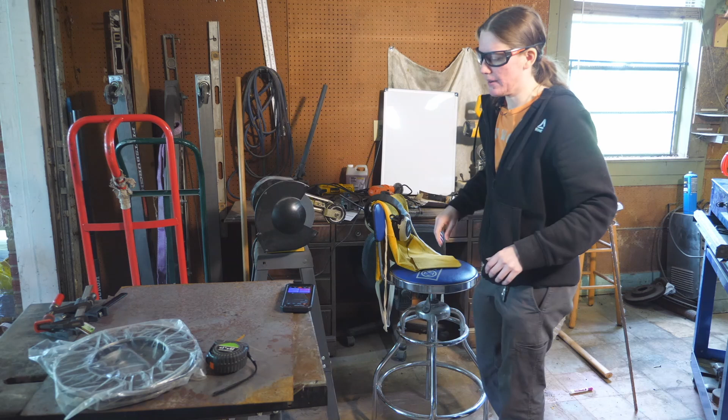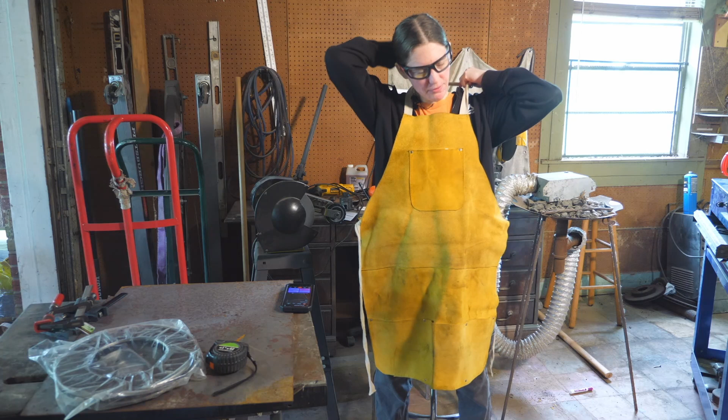All right. I guess I'll put these guys over here for the moment. Let me put my apron on, just because it's part of my costume a little bit, I guess. And today, for the most part, I probably won't actually have to use, okay, I think it should be all right. Sorry about any popping or clicking that happened when I put that on.

So first of all, we're going to kind of design the coal forge. And so what I did was I brought my old coal forge inside the shop, right? So this is it right here. And basically what this is, it is a piece of cast iron. I'm not entirely even sure what this pan is.

We got it in the boating section of our local farm supply store. And I don't know, so maybe it's like a propeller or something. I mean, it could be any number of different pieces of boat. But it's kind of got scalloped edges and a hole in the middle. So I don't know, it kind of looked like a hubcap or something.

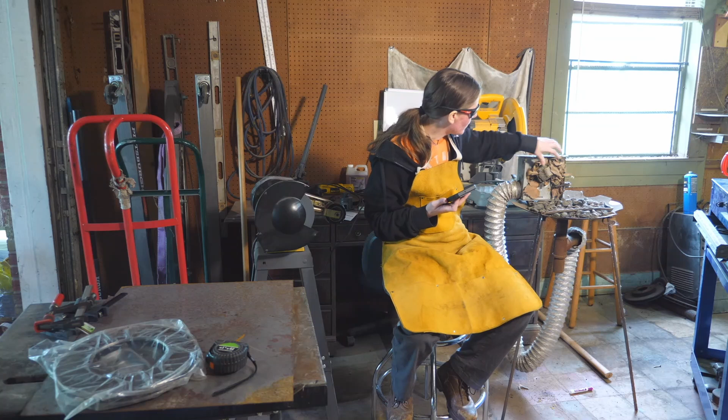Anyway, so I kind of welded some 1/2 inch round stock for legs, and I put in some like clinker breaker. And then this is my, well, that's covered in leaves, but this is an old bathroom fan. So it's like a vent fan that, you know, when you take a shower and you've got all that steam in there, you turn on the bathroom fan, and that's what this was. So that's how I got the oxygen for my coal forge.

And so right now, this guy is what I have as far as a coal forge. So it's really small. It's not very sturdy. You can kind of see that it jiggles quite a lot. And it does not hold a lot of weight. So when I decided that I wanted to do things like axe heads and a little bit of Damascus or some forge welding, I knew that I was going to have to come up with a different solution for a new coal forge.

So that's what we're going to start working on. This is just not sturdy enough for the amount of steel that I want to put in it. So we're going to start from scratch. And we've got a good selection of materials over here that we get to work with. So first things first, I'm going to get rid of this so I have a little bit more room to walk around in. I just brought it in here because I wanted to make sure that you guys kind of see, you know, what our goal is.

So we need a place to keep coal, a place for the air to come up and pump more oxygen into that fire to get it up and hotter, and a place to kind of allow the material to rest. And this is really small, so there's just not enough room for that. So yeah, I'm going to move this out there, and then we're going to start talking about some of the materials that I've gathered, and we're going to start designing it.

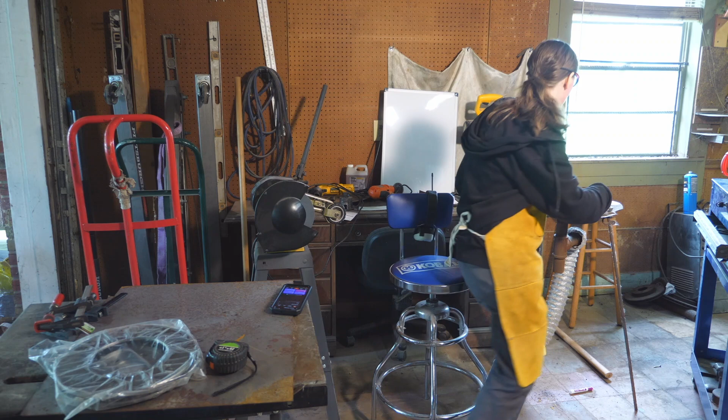So off this goes. Whoa. This guy only has 3 legs, so it's kind of a weird tripod thing going on. I dropped my marker. Okay.

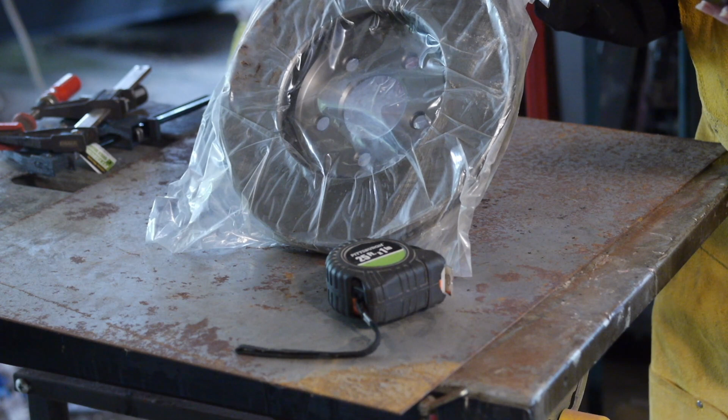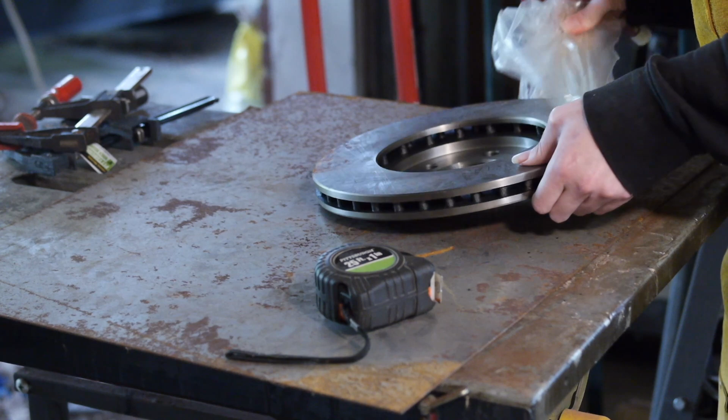Ooh, it's a little on the greasy side, so I might have to go and grab a piece of paper towel and a few. So, I mean, it's a very typical disc brake. You know, you've got the area where you can put the lugs and the axle through here.

And so basically, every coal forge kind of has what's called a clinker breaker. And as you burn coal, all of the stuff that doesn't burn, that's called clinker, and it becomes like a glass, like popcorny shaped substance. And so we want to get rid of that as it develops. And so it goes through this hole here.

And then you attach it to a series of pipes on the back. And that's also where the air comes up through here so that you can get that oxygen to heat up that flame. So this is the main section of the burner of the forge. And so what is going to happen with this is it's going to sit in the center of this piece of sheet metal. And this is going to become the actual forge itself, right?

And so the next thing that we kind of have to deal with is what are we going to do for the sides to make sure that the coal is staying in here? Because right now there's like no sides. So as the coal gets pushed around by the material and me with a coal rake, it's just going to fall off the side, right?

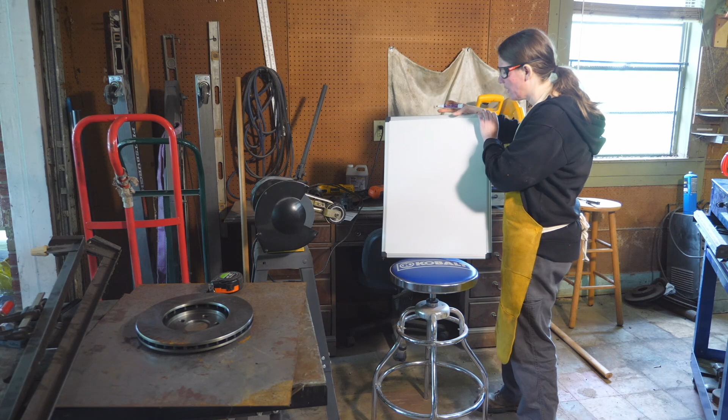So I'm going to move over to the wide shot again, so you guys can kind of see what I'm thinking about as far as a design. So this right here, can you guys see me? I think you can. Yes, okay. So this right here is my whiteboard. And so I'm going to draw myself a little design on this board. And I'm hoping that you guys can see it too, if I move it over here. Some of you guys are familiar with my whiteboard, because I have in the past used this to demonstrate the design that I'm going with.

So we're going to kind of, this is going to be our front edge right there. And I'm not sure if you guys can see that or not. It might not be dark enough.

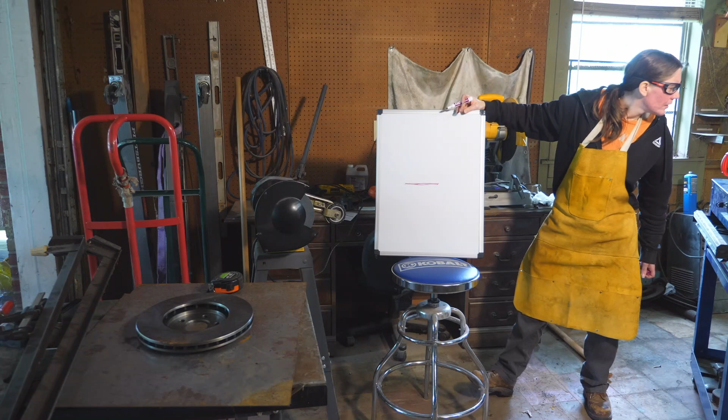Can you guys see that? Maybe a little bit. All right. So we still haven't even talked about the legs down here. So I actually have some 5/8 inch square stock, and I'm thinking that if we do some V-shaped legs, so they will be kind of like a U or a V. So this will be like the end of the leg here, and these will attach at a 45-degree angle to the table of the coal forge.

So if I go like so, we can kind of denote, and I didn't do that angle very well, but that's all right. So this is kind of going to be the top of the forge. And that's kind of going to be the brake drum in the center of the forge. So we've got, this guy all the way from here to here is 18 inches. Whoops, because I'm doing this sideways here. 18 inches imperial. And then this is 2 feet imperial from here to here.

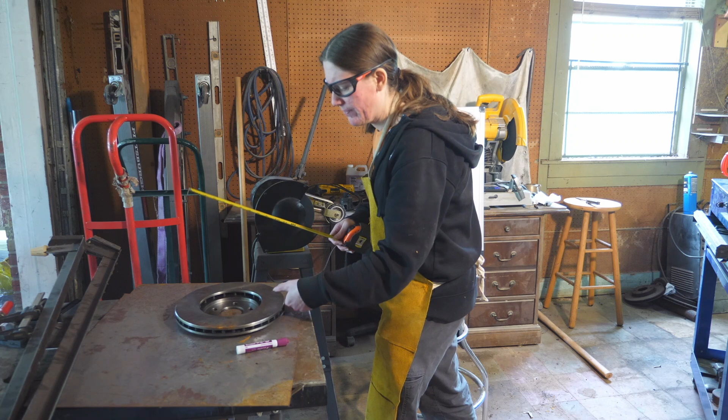So then I also need to make these legs. And then I also need to measure the central forge pan, the disc brake. So, whoops, let me put that there. And we'll cap this. All right. So if I take this guy right here, which is the disc brake, and I measure that, that is 11 inches wide on the diameter. So that means that this area here is 3.5 imperial, from there to there. And if that's 2 feet, this is almost 1 foot, so that's probably about 6.5 inches this direction. Once again, imperial.

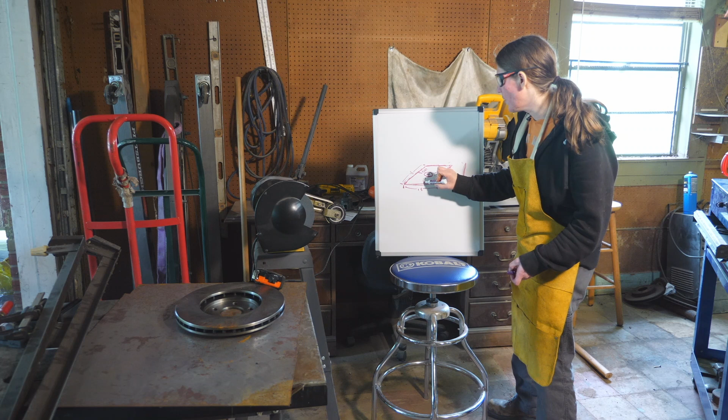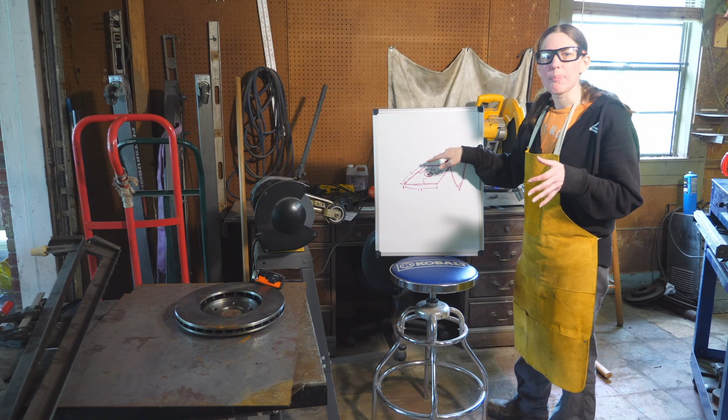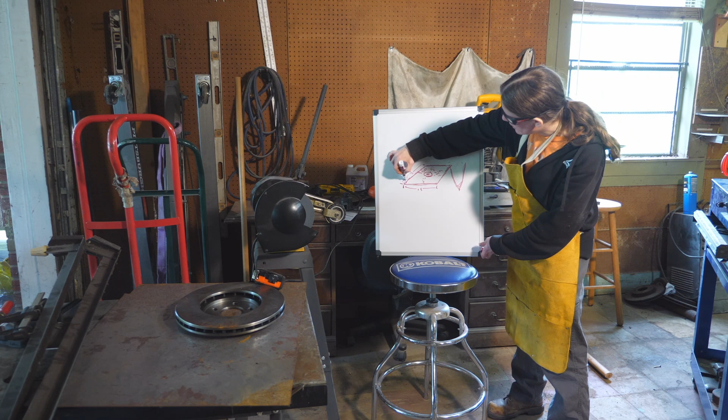All right, so now we've got the top kind of denoted a little bit. And so now I'm going to try and figure out how long these legs need to be. So we've got these nice U-shaped legs here, and I'm pretty happy with that. We're going to denote that we've got edges. And so these are going to be those bed frame edges.

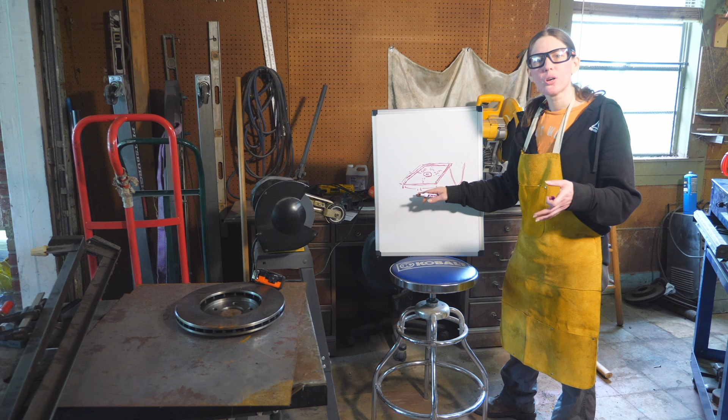Now, I have left this front edge open, and part of the reason why I want to do that is if I am working from this front edge, it's a lot easier to lay my steel across this sheet if I have this open. Like my gas forge, it has that flat opening, and then I've got that sawhorse that sits right in front of my coal forge like so. And then I lean the material on that to raise it and keep it flat so that all of the material that I want in that burning hot area stays level on that table.

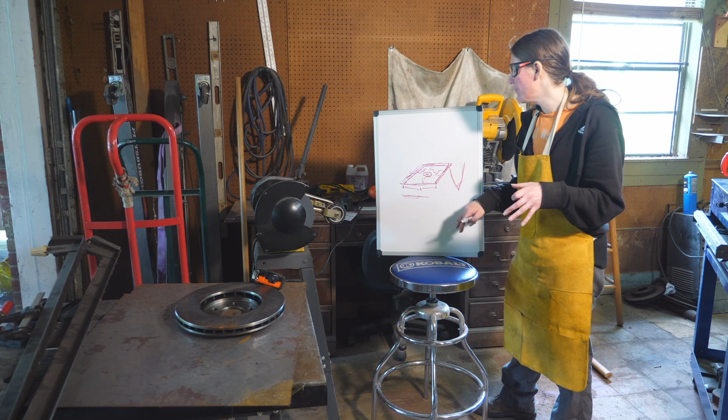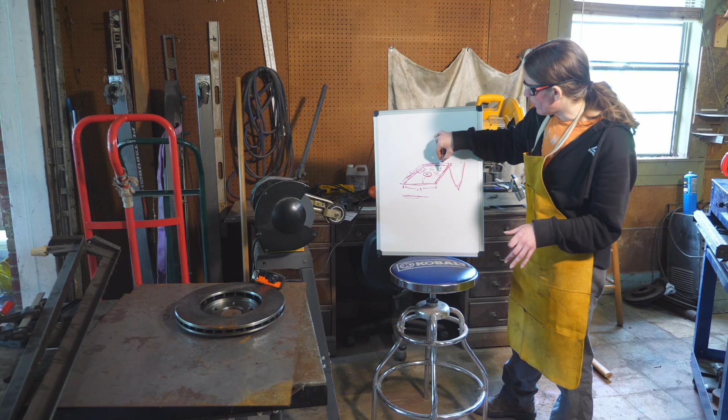So it'll be a lot easier if I don't have anything in front of here raised up. Otherwise, it will angle the material this way, and I won't get that flat angle that I want in that central pan. So I know that I still need some support in the front here. So I think I'm going to cut all 4 of these guys, the angle iron from the bed frame. And what I'm going to do is actually put that lip down instead of up. So then I still have support on that front edge of that angle iron, and I have support on all 4 sides, but I have that flat edge that I can work out of. So that's a pretty good design for my forge pan itself.

And so now I need to determine the length of these legs here. So I really like the height of my table here. And if I measure from the floor to the top of the table, I can see that this table is about 33 inches tall, right? And I'm pretty happy with the height of this table. I think that's a pretty good height. So I want from here to here to be 33 inches imperial.

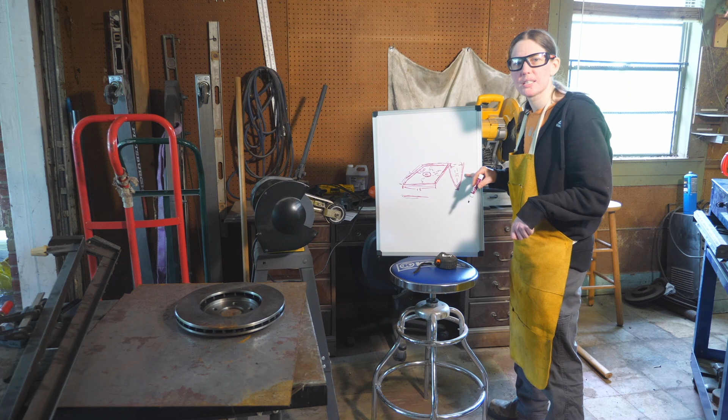And then we need to decide the distance between here and here. So we need this distance now. So we're going to make that U shape. And we know that this length here has to be at the very least 66 inches. So if I add a few inches for each of these sides, I can hit 70. So that's 2 inches over this 33 inches.

So if I make this distance from here to here 35 inches, then that is 2 extra inches on this side and 2 extra inches on that side. So then I can get that triangular shape. And we're going to put those kitty corners, so they'll meet right there, go down here and then meet somewhere in the middle right there. And we're going to support it on all four corners. So that's the ground right there.

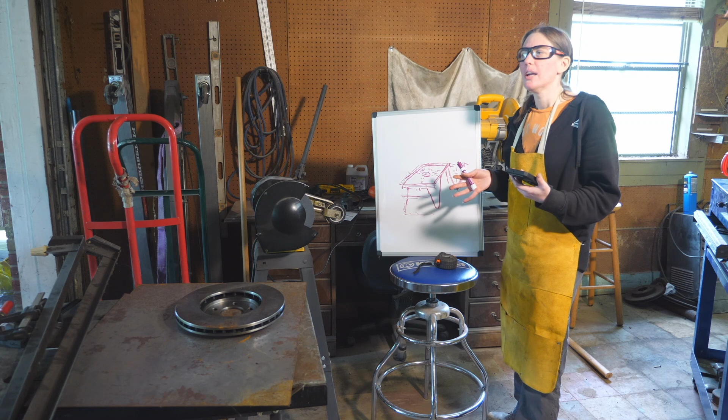Are you going to use coal, coke, or charcoal? I am going to be using coal in this particular forge. Mostly because I have about 200 pounds of coal, and it burns hot enough to forge weld and things in it, but it doesn't burn quite as hot as coke does. Coke burns a whole lot hotter than coal, and I don't think that my forge pan would survive very long if I was using coke in this particular forge setup. So I will be using coal.

If I decided later that I wanted to use coke because it was just more available for me, I probably would look at modifying this design, because it would be a lot easier to keep it for a longer time if I designed it specifically for coke. So we now have our design for this coal forge. And now we can look a little bit at the materials that we've got. And I showed you a lot of them.

Air blast from underneath fits coal and coke perfectly, but charcoal requires a side blast to work as it should. Yeah, and it really does. There are a lot of traditional Japanese forges that use a lot of charcoal, because it was a lot easier to get a hold of charcoal than coal in Japan. So they have boxes that have these little levers that you would push back and forth, kind of like a wooden bellows, and that's how they would get their side blast.

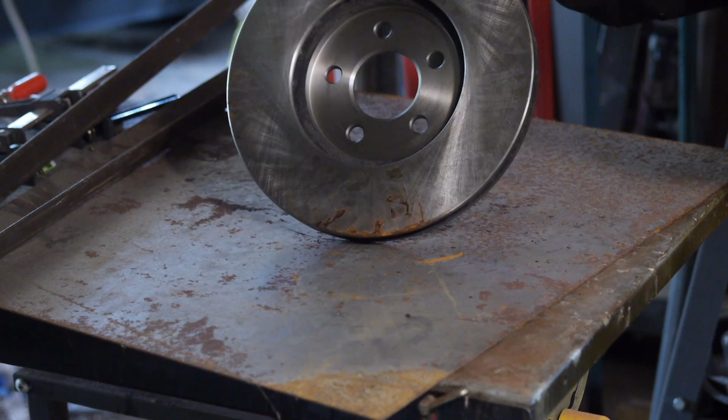So yeah, for this one, we are going to do a blast of air from the bottom. And how we're going to do that is we are going to take that circle that's right here on the disc brake, and we're going to weld some black iron pipe to that bottom so that it makes a really good clinker breaker, and a T in there, so that we can give ourselves a side to put the airflow so that it shoots up this hole and into the fire. So that's how that's going to work.

And so we now have our design, and I hope you guys can see that. Like I said, it's a little bit light and it's small on my end, but I think you guys can see it a little bit. Maybe if I bring it forward some, you might be able to see it a little bit better. But this is the idea that I have for the forge. And so that's what we're going to try and start building today. So I'll put this over here for the moment.

And yes, in Europe and most places, blacksmiths have extensively used charcoal for 2,500 plus years. It's great if the forge is set up correctly. Very underrated. And it works very beautifully for blacksmithing. And people have been using it for many, many years.

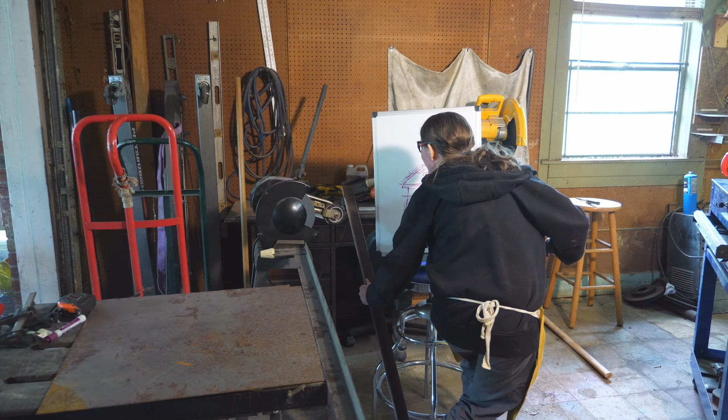This is the first time I have worked in this particular shop orientation. Normally I work over there at my smithy section, and this is kind of my cutting and grinding area. So yeah.

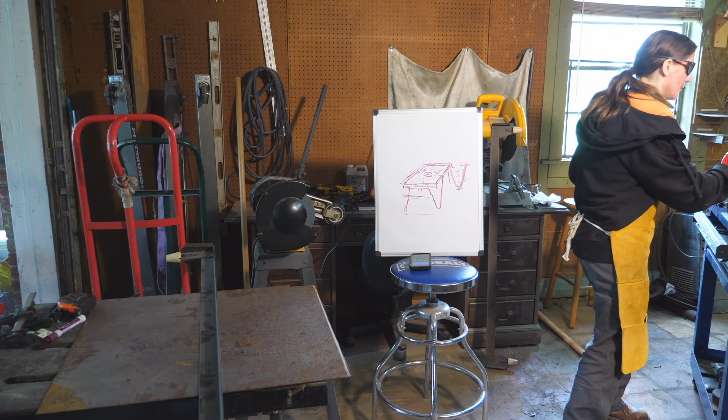Sound is extremely clean today, almost no popping at all. Is there something in the usual place interfering with the microphone? That I could not tell you. I have no clue. I mean, I don't know. There's a whole bunch of steel, but other than that, I haven't really changed much. Let's see. I did change where I'm putting the little receiver. I normally put it in my jean pocket. Right now it's in my hoodie pocket, so maybe that helps.

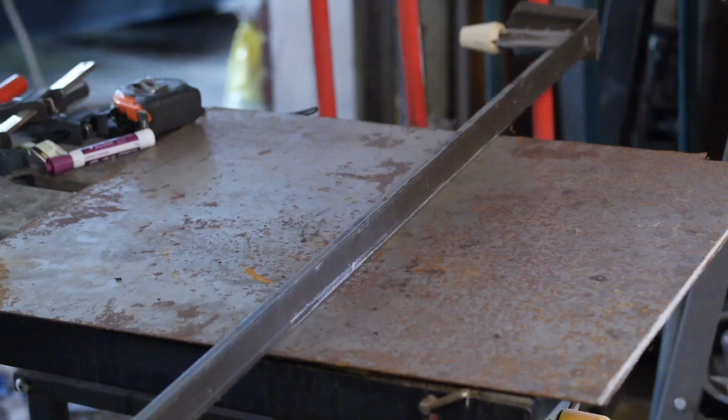Okay, so I'm going to move us over so that you guys can kind of, okay, can you guys see that? Maybe if I move it a little bit more over here. Okay, so you can see that whole line, but there is sort of an area there that's underneath the table. So if I cut it there, I will cut into my table. So yeah.

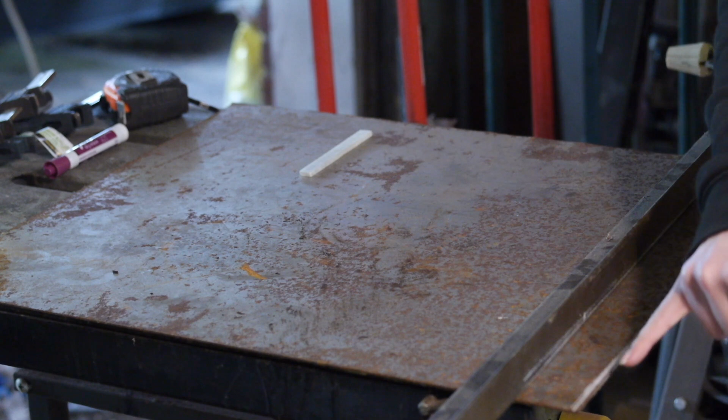Now I have this nice line here, and we're going to cut along this line. So I also think that we probably want to move this over here. And I've got these lovely clamps here. So we're going to kind of move this so that we can use this bed frame a little bit as a guide for ourselves. I'm not sure if you guys can see me very well.

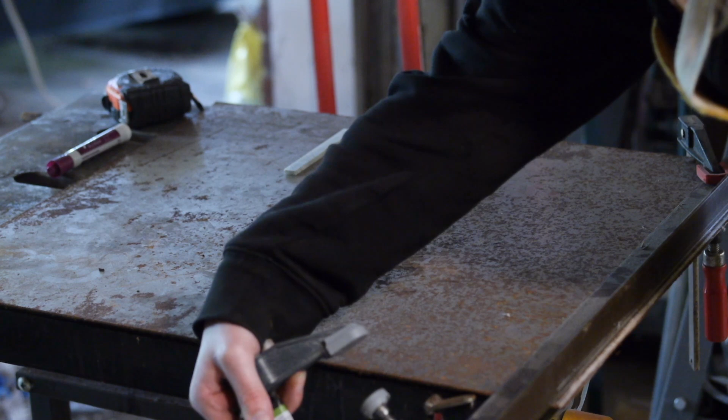Could be the sound compressor isn't working as hard with the forge off. And that is amazingly true. Right now, like I said, I don't have the forge on at all. I'm just talking. And the only thing that it's really compressing is like the traffic noise outside. In a minute, I will be turning on the angle grinder, and that might have an effect.

All right. Is this all the way? Oh, that's why. That's why. Okay. That's not a happy camper. So this welding table kind of has a few little side things like that. And this little side thing is interfering with my clamp a little bit. So we're going to do our best and see what we can get.

Although the popping sounds more like the connection drops out. I have no idea, to be quite honest. I wish I did. I really do.

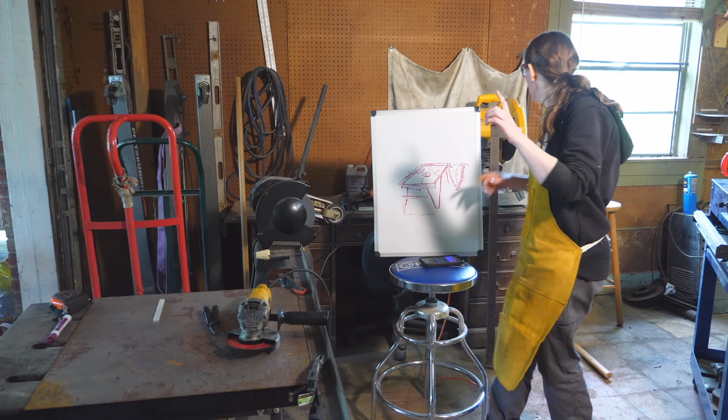We want to make sure that we are safety first and all that. So lovely dust masks. And there's that one. Normally the dust that's created from an angle grinder and also a grinder, like this bench grinder, is relatively large, but when it is up in the air, it's still easy to breathe that in. So you definitely want to have a dust mask when you are doing things like this. All right.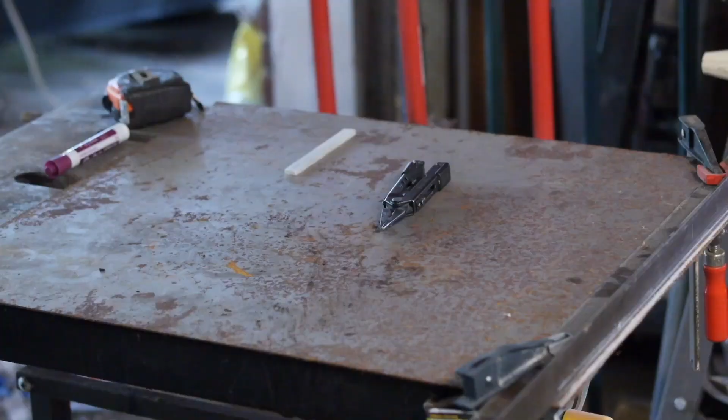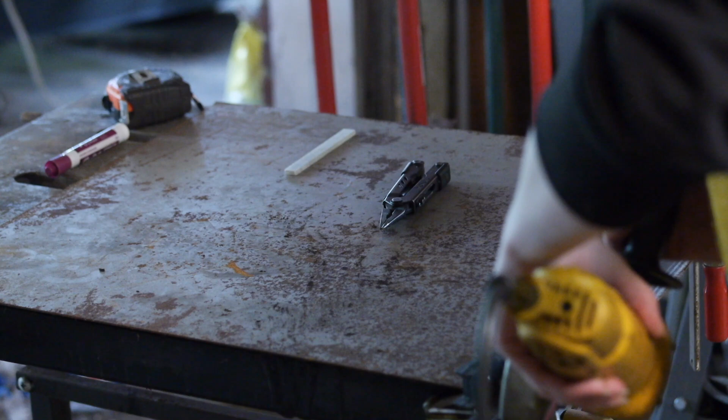So let's see. I did not. Okay, maybe if I go like this, I should be able to. Okay. So hopefully you guys can see this well enough. Well, that's fun.

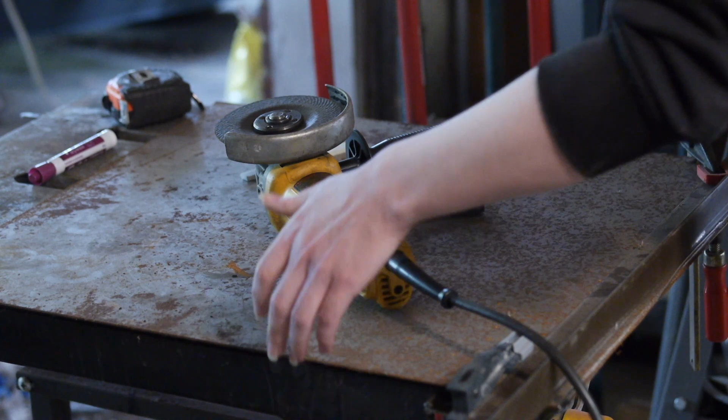All right, so I know that I did not do very much of that, but I am throwing sparks towards the cameras, and I'm not entirely excited about that. So what I think I'm going to do is I might, where's the best angle for this? Can you guys see that end of the table? No, you can't.

I'm going to turn this table this direction. And maybe. See, the problem is the guard here is going to get in the way here, or the guard here is going to get in the way over here. So we're having a little bit of issues. Maybe if I take this guy off in general, it might help us. I'm usually pretty good at giving myself enough space. Oh, I see what's happening there.

My partner is coming to give me weights. Are these for the table? For the table. Okay. It's shaking around quite a bit. It is apparently shaking. How about I put them that way? You might want to bring your tape back a little bit. Okay. Just because it's too tight to see all the way through. Apparently it is too tight to see. Let me get you some sandbags. Oh, okay. That's you. That's me. Okay. All right, and I don't think I can bring my tape that far back. Let me see. Because otherwise I can't even get in it.

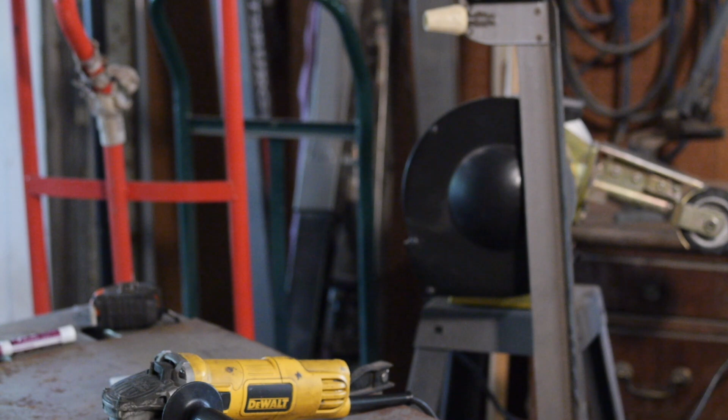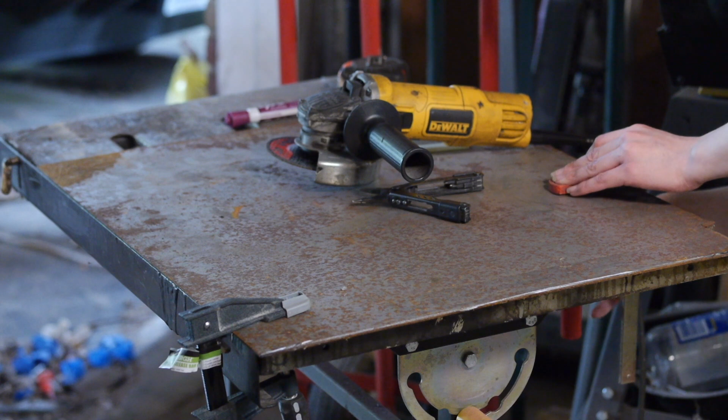Let's see. Hopefully you guys can still see. I apologize for the shaking. And then it needs to go up a little bit. All right, what's that look like? Now you can't see anything at all. All right, let's try this again. I'm sorry, guys. Whoa. See, the problem is that, there we go. I think you guys can see relatively well now. Sorry about that, guys. Okay. All right, let's try this again. I am going to tighten this back up so that we don't go anywhere. And we can still look at this line over here. And I'll move that under there. Okay.

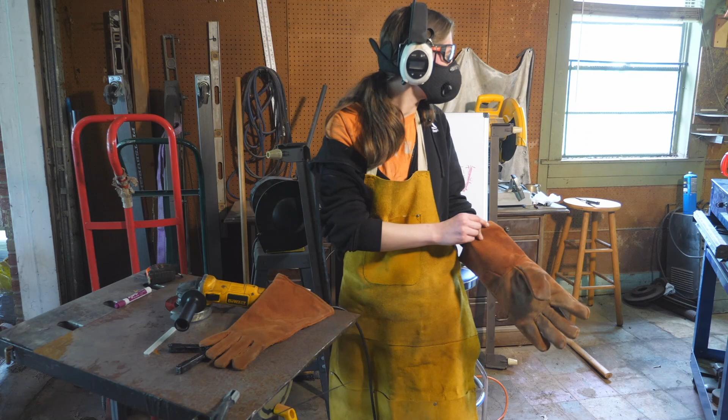All right, so I got a little bit of excess bumpage right there. And this guy kind of came up and got me in the arm, but there's no blood or anything, so I'm good. That I need to grab a glove so I can touch it. So I hope you guys can still see. All right. That just gets in the way.

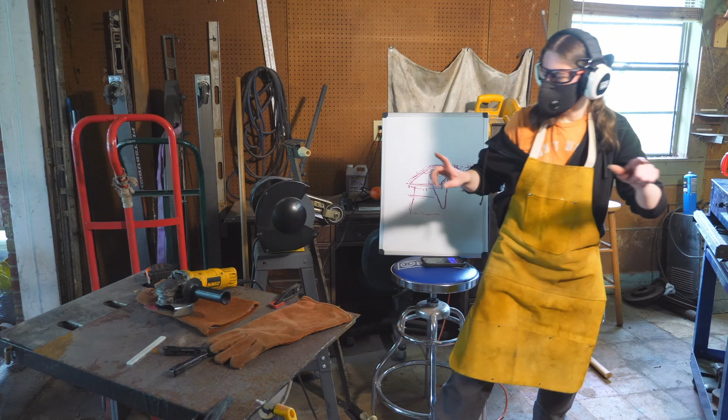As I step on that guy. Okay. Good enough for now, for this side. I will be doing a little bit of grinding on there just to kind of make it a little nicer looking. It's kind of gnarly on that edge. So now we're going to work on this edge here. So we're going to do some measurement there.

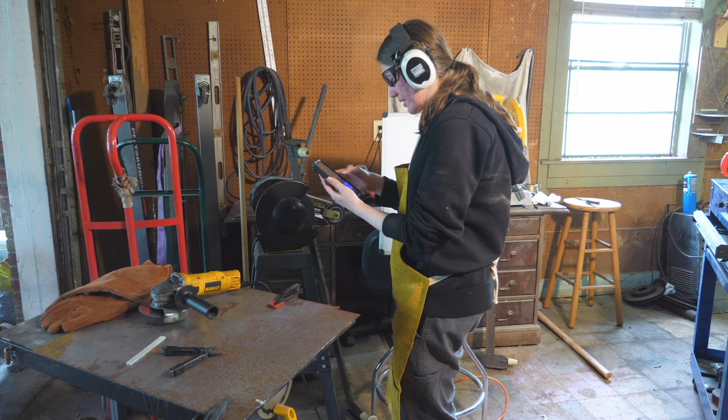Okay. Looks like I am still connected to my chat. All right, let me take a drink real fast. That way I can kind of wet my throat as I speak.

All right, so let's undo this guy. And we'll move those over there. These can go back in my pocket. All right.

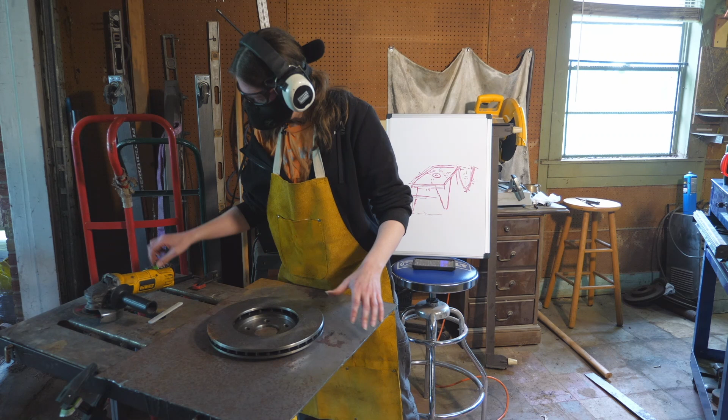So the next thing that we want to do is kind of take a look at this with our forge pan. So if we take a look at that, we can kind of shuffle it around a little bit. Since we are at 18 inches, we need to move this a little bit this way. Okay, just a little there. 3 inches there. Okay, that's good. It's pretty centered in this section here. And I guess I don't actually need this guy anymore, or really this guy.

So right now what I'm doing is I'm trying to center this disc brake so that I can create a good area to denote where this is going to sit in here. Now I want this edge to be what it's sitting in, so that this bottom section here sits through a hole in this sheet, but on this as a lip, so that it's got a nice amount of area to keep it from falling through.

So now we're going to figure out how far from the center there. Okay, so that is 7 inches there. 1, 2, 3, 4, 5.5 there. So if we go 6.5 and 6.5 right there, we now need to offset it just a hair that direction. And we are now pretty centered on here. And you can kind of see,

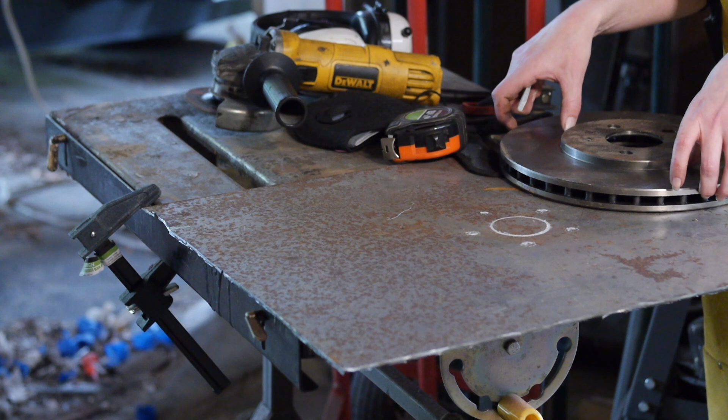That's going to be a front rotor, no top hat on it for the parking brake. Yep. Front or rear axle? Yeah, honestly, I don't know. This guy is a new one. I know that I have other disc brakes that are a lot deeper, and I think they're rear ones, because they came off of a Kia Rio, and I know exactly where they came from. But this one, I have no clue where this came from.

It just ended up in my shop one day, and I was like, you know, it's really nice and shallow. It's going to be a lot easier to maintain heat and get my steel in here because it's not nearly as deep as the other ones tend to be. And that's kind of the problem with disc brake coal forges, is that they tend to be really deep in the fire pot. It makes it a lot harder to get middle sections of large bars. So this one looked pretty shallow, so I liked that quite a lot.

All right, so this is nice and round, and I have another piece of round steel that might be the right size for that. Not going to be a coal gobbler. I'm hoping it's not going to be a coal gobbler. Usually when they are deep like that, they do burn so much coal.

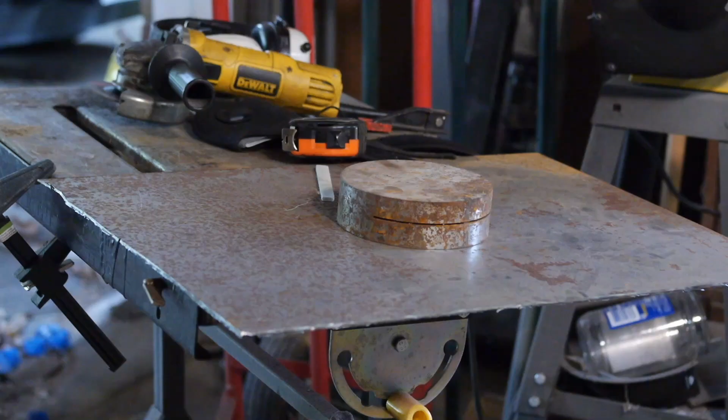Have you seen the water-cooled forges? I actually haven't. That would be really cool to look at. I poured water on my forge before. Does that count? I mean, the forge itself is cooled with water. It definitely is cooled with water when you're trying to get rid of all of your fire and end for the day.

Okay, let's see here. Okay, so it's relatively centered that direction. Need to come down just a hair bit there. And I'm pretty sure that's pretty centered. So let's trace around here. And we'll pick it up and we'll see how close we are. Really far off. All right.

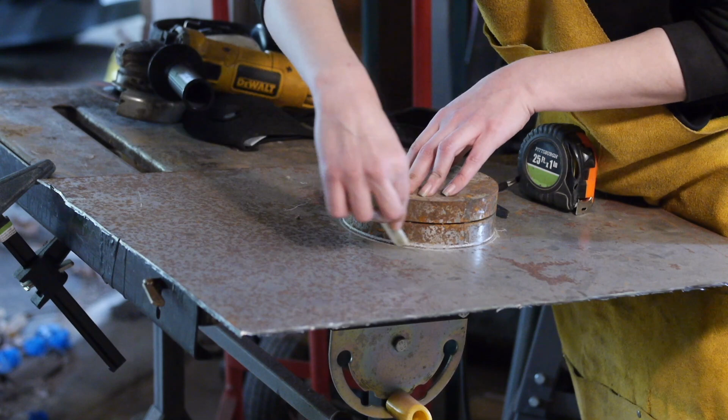That's 6.5, 18 inches. 1, 2, 3, 4, 5, 6.5, 6.5. So yeah, that's really far off. All right. So let's try this again. Now we'll see again how close we are. Ooh, that's a lot closer. I think that's a pretty decent attempt. So I'll put this on the floor. And I'm pretty happy with that.

Because you'd be able to save your fire pot for a lot longer if you're cooling the edges. See, the problem with a lot of people's fire pots is that they get so hot. Even the cast iron and the brake rotor fire pots have a tendency to melt over time. So if you were able to water cool them, it would last so much longer. That is a great idea.

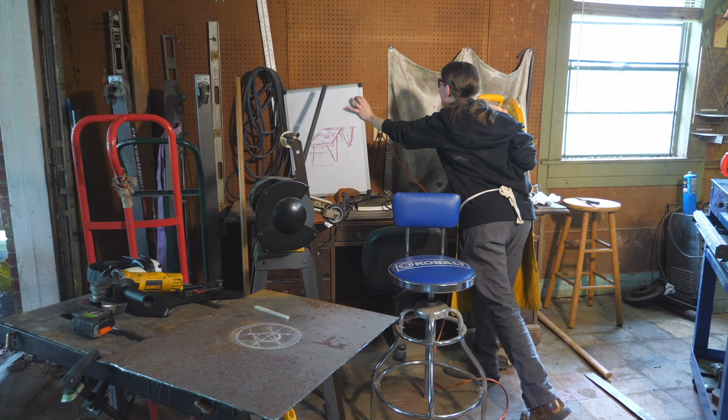So, I do have a jigsaw, but I believe it's either in the cold shop or in the house. I'd have to go and grab it. Let's start by drilling the holes, though. I can do that relatively easy. I actually brought myself a drill. There goes my phone. It didn't shatter or anything, so we're good. I'm going to put this over here. And I'm a really cheapo person, and I still have this awful Black & Decker corded thing.

Holes in the brake disc is not a good thing. They are usually very hard. Oh yeah, I'm not doing holes in the brake rotor. I'm just trying to do holes in the plate that's going to be the forge pan, so that I can cut a hole in here so that the disc brake will sit inside of it on the edges. So I have taken this piece of steel right here, which is about the same size as the interior of the disc brake that we have, and traced around it. And so we're going to drill holes around this little edge here. Yep. We are making holes for the disc brake, which is the fire pot, and the plate will be held.

Yep, exactly. So right now I have a wire wheel on my drill because the other side of this piece is incredibly rusty, and in order to weld this piece onto the edges that we're going to make out of this bed frame, I'm going to have to take the rust off of it, because a dirty, rusty piece of metal isn't going to hold the weld together. It's not going to arc, and dirty welds never work. So we will get there eventually.

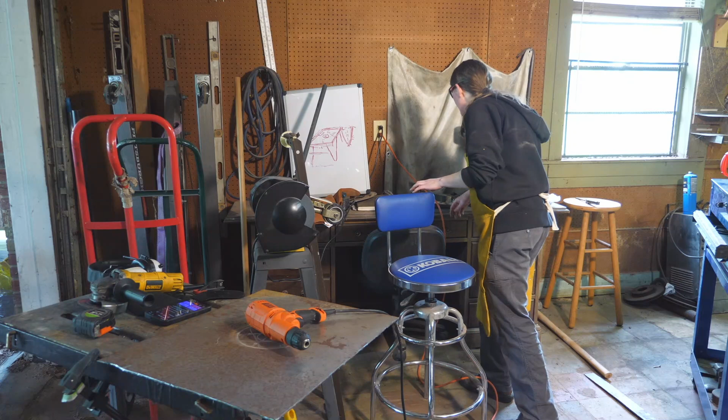Okay, now I need a bit. Do I want to use this bit? Or do I want to use a different bit? Those are all wood bits. I think I'll use this one. We will try at least.

Step bits are handy for sheet metal work. They definitely are, but these bits are relatively easy to get a hold of. I will buy a brand new drill bit for every new project that I do, because they do dull all the time, and that's partially why I have to buy new ones every time.

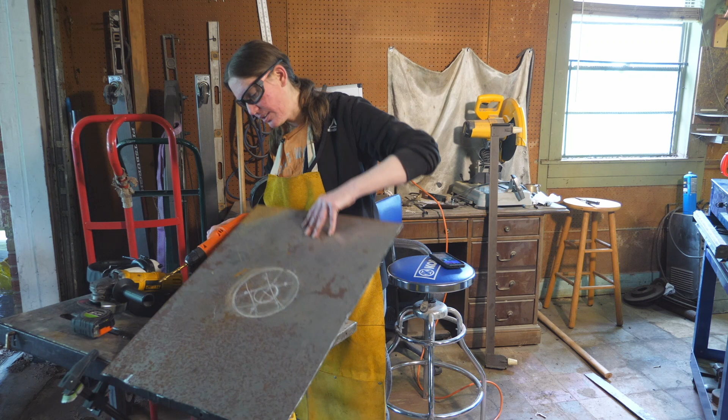All right, let's see. Gotta make sure that it's all nice and lined up with the holes in the welding table so I don't drill through my welding table. Or I can take two pieces of wood, and I know I have some wood around here somewhere. Give me half a second. I think I have a couple blocks of wood. Maybe we took them all out of here. I don't know. Let's see here. More sheet steel. Yeah, I'm not seeing any of my wood blocks, except for the ones that I use for my other stuff.

All right, we're just gonna sit here and pay close attention and align it as it comes out. Okay, so we're gonna start right here, I think. Not the best idea, but sometimes you have to. Yeah, and that is so the case. Extra holes in the table for speed, exactly.

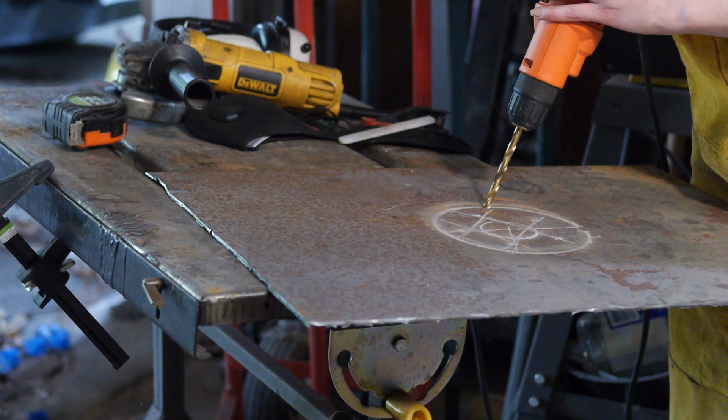All right, we're going to go right here. I'm going to start here because I can kind of see there's a hole right here, and I know that it extends to about here. So we're going to start here, and then move this around a little bit. And the other thing I'm going to do is grab some oil so that I can kind of cool this out. Weight reduction, exactly. All right. So a little bit of oil so that we can keep our bit a little bit cooler.

It is not wanting to bite in here. Not at all. There it goes. All right. There we go. Nice, pretty hole. Exactly where we want it. All right.

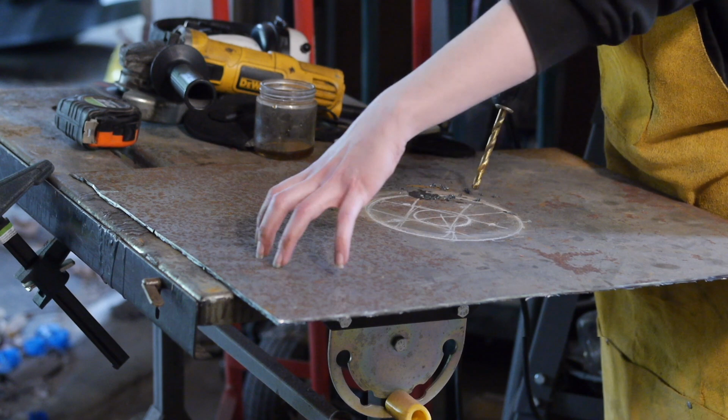All right. So right now we are making a coal forge. Right now we are drilling a hole for the coal pot, which is going to be a brake drum. This is the interior section so that it'll sit on that exterior section that is the stopping power of the brake drum. And so this is the rest of the pan where all the coal is going to sit. And it should work pretty well.

I'm kind of thirsty. I'm going to grab a drink real fast.

That bit seems to be letting you down. It definitely does. But it's a really cheap bit, and I've used it for a lot of different projects, so that also does not help.

All right. So we're going to start on this side right here and line that up with the slot. I'm planning on doing about four of these at first. And then we'll see what we can do to go from here to here and here to here to cut out as much of this circle as possible. And then we'll use a grinder to finish the job, I think. So let's start this again. Oh, it helps when you turn it so that it's going down and not up.

Here we go. All right, it's starting to bite. Yeah, this is an old bit. There we are. Hole number two. I'm going to move some of this stuff off of here so that I don't knock it off.

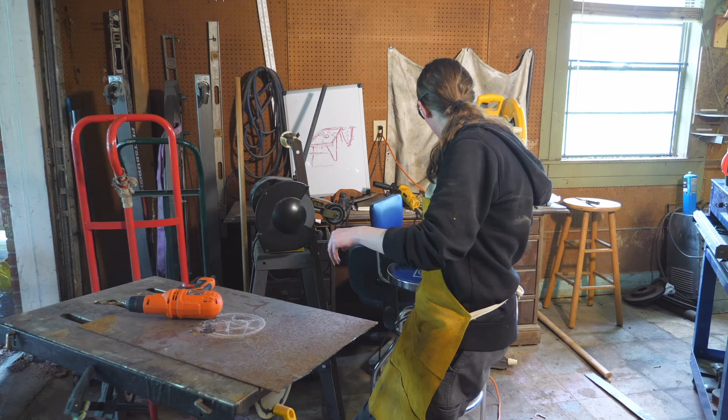I mean, I'm working with what I got. I think I'm doing all right. Extra effort is, you know, it's that extra blood, sweat, and tears. It's going to make it a better forge, right? Okay, let's put this. I need like another table or something. There we go. There's that. Okay. And I'll put that over there.

I'm really enjoying the stream. You're doing wonderfully. Well, thank you. I do my very best. Like I said, I'm excited because the last several streams of mine that I've done have been incredibly unstable. And it's working really well. And I really think it's that whole, you know, I was complaining to my partner about the stream being unstable. And he's monitoring it right now, so obviously it's not going to act up. Because that's how this stuff works.

Let's see. I'm going to take a drink real fast. And honestly, I think I need to switch my clips real fast. I've been not paying nearly enough attention to this. I really need to pay more attention to my camera clips too.

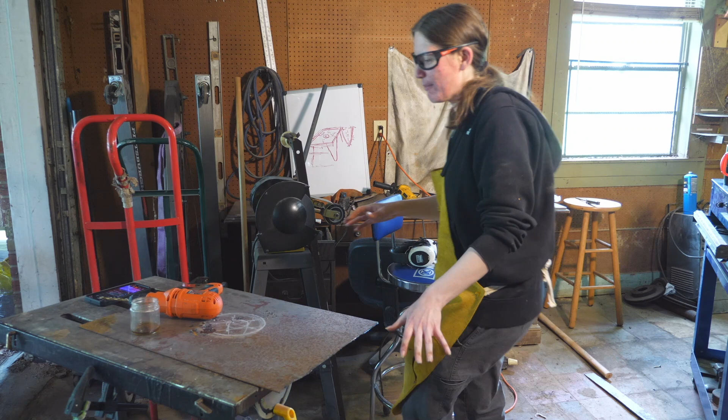There we go. Intermittent faults are terrible. I know, but that's the issue. I'm having intermittent problems with the stream stability, and that's the worst thing, right? It's like when your stream is completely interrupted by the internet, or instability in the... there, it's still going okay. There it is, the button, and the internet and things like that. And I've been having a lot of issues with that, but today it's doing really well.

Get the Bosch 14-piece kit. I had a Bosch 14-piece kit at one point, and as I worked, the bits started wearing out, and so I've had to replace them. Sometimes I spend a little bit extra and get more of the same. Sometimes I cheap out, and it kind of depends on what sort of project I'm working on at the time. Like I said, I really haven't bought a new set of bits in a while.

Dirty, I just installed one of your fun stickers on my propane bottle. Save an anvil, bang a blacksmith. That is a great sticker. That's a great sticker. I might need a sticker like that.

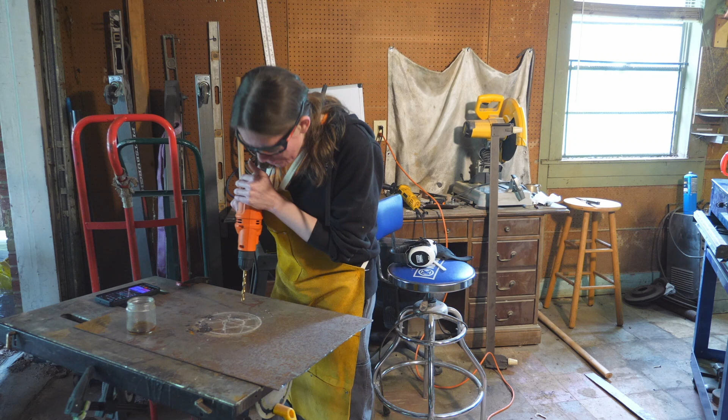Alrighty. Let's start another hole. We'll start one about here. Oh, you know what? I should probably change. I guess I'll be all right. I don't need to change the camera angle. You guys can watch me struggle with this for one hole. Haha. 3 holes.

And I would love to say that the reason that I'm using a crappy Black & Decker corded drill is because I'm trying to show people that you can blacksmith and fabricate using whatever tools you have available. But that's really not the case. It's just that my cordless DeWalt drill broke a while back. I feel like they only last about a year for me for whatever reason. They just aren't as good as they used to be. So I do the best I can. It is true though.

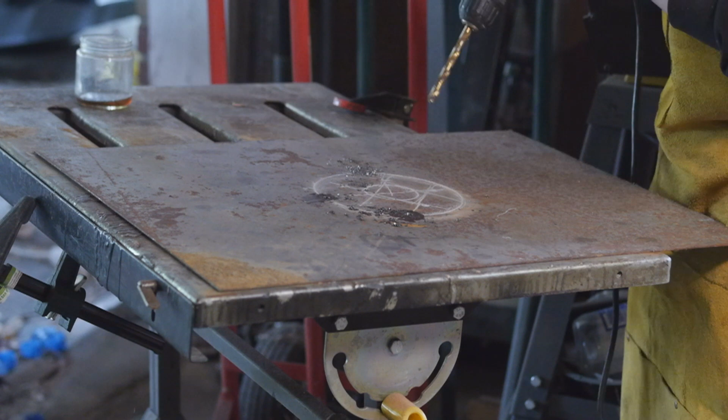All right, so we're going to do another hole. And this time I think I'm going to go to the close-up cam. All righty. One more hole for the moment. We're going to start right here. There we go. Much more better. We're getting there. This guy is getting duller by the minute. There we go. Haha. 4 holes. Okay, I think I'm done drilling holes for the moment.

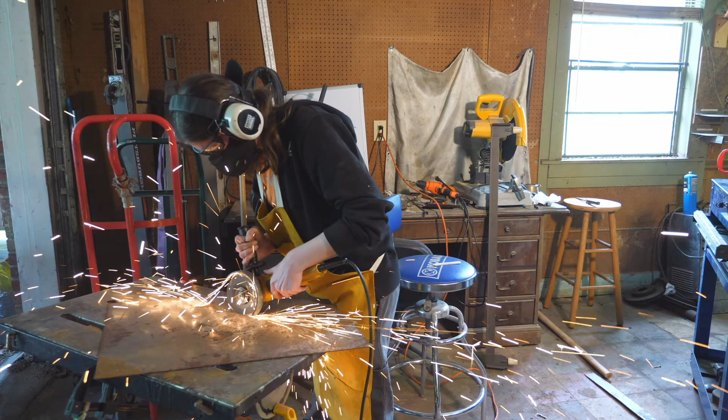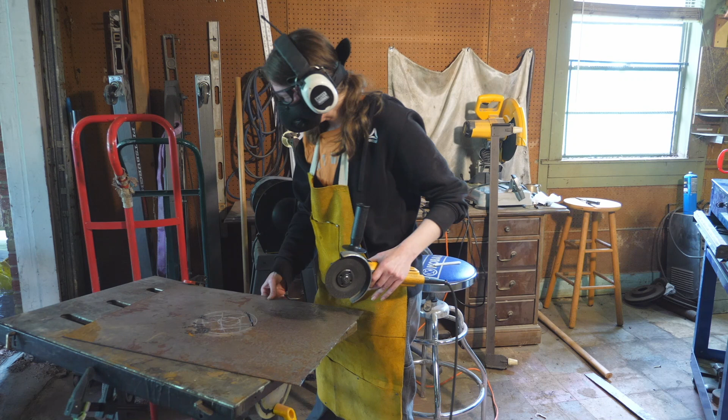The piece of steel shifted on me. Maybe I should actually clamp it down. You know, I forgot to do that. I need to clamp it down for the next one, so it doesn't shimmy and I don't end up going through my table. Much better. There we go.

Haha. That just adds iron to the water. Yeah. Okay. Let's do the next cut.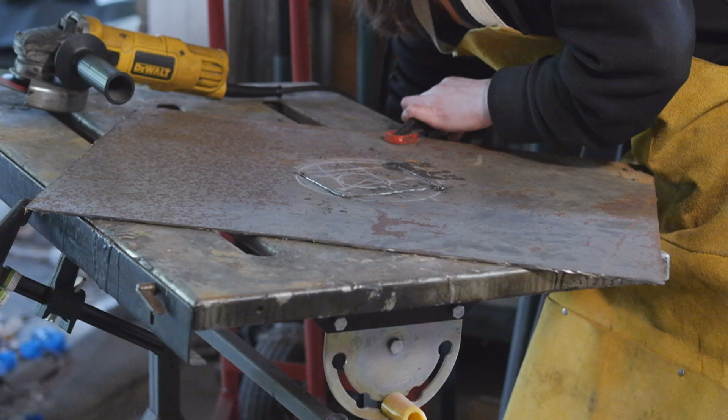One more cut to go. At least for that. Then we'll get to kind of take all of the rest of this extra out. But like I said, we're kind of going to assess where we are. Alrighty. Let's start this direction.

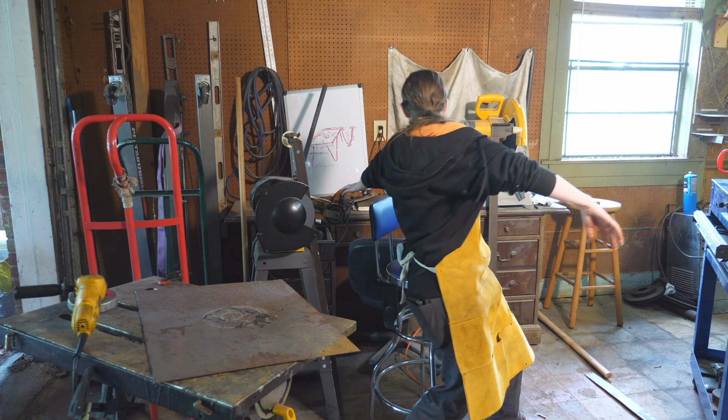Alrighty. Stick that over there. Undo this. And alrighty. Stick these over there. And that's the wrong hand.

Man, I always have left gloves, but never any rights. I feel like every welder and blacksmith, it's always that way.

Okay. So we have the first little area gone. So now we just need to take off some of this area here and there. And we can use the angle grinder to kind of take some verticality out of that. It should be a lot easier from here on now that we have this nice round area.

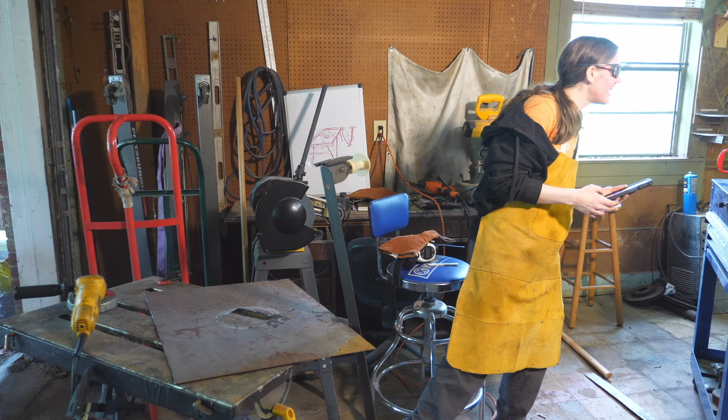Lost Viking. Oh, okay. How are the legs going to mount to the plate? So I'm planning on doing 5/8 inch square stock, and we're going to create V legs or U legs. So we're just going to bend them in almost half, and then we're going to weld them onto the bed frame at a 45-degree angle.

So I've got the bed frame here, and what's going to happen is I'm going to kind of weld the frames so that the bed frame is underneath and holding up the plate on 3 of the sides, and then on the 4th side, instead of having the edge go up, it's going to go down. So we're going to have an entire bed frame on 4 of the sides, and so the V legs are going to be welded directly onto the bed frame.

Got it. Yes. Welding for the win. So we will be welding the sheet to the bed frames and the legs to the bed frame on the other side. So it will have 4 V legs at 45s. So that is the plan.